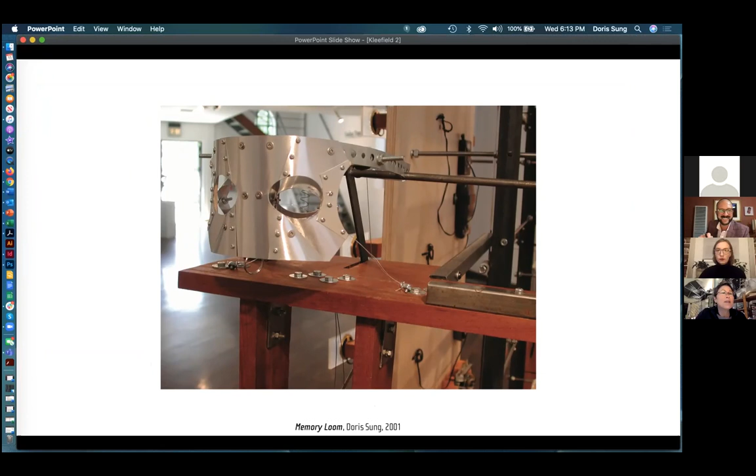Without going back through it—again, thinking about what I said about the artwork—this is a piece that I did. Can you see it? Let me try one more time. Tell me if I'm not progressing through it. Can you see, now it works? Okay, so this is artwork that I did in college. I'm not saying it's good at all, but I did it.

The biology I majored in college, I was very infatuated with—the connection with man, the artifact, the man-made versus the nature-made, and the extension and prosthetics of the human body. So the Rebecca Horn fingers, the sensation extended through the inanimate object. And then the question ultimately of why can't architecture be like that? Why can't architecture feel things, or why can't I feel things through the architecture, and it be dynamic just like my own body?

So even in graduate school, I actually built this—it was also a mechanical device that moved and responded to my face. Ultimately what I did is I designed a mask, not that it was for a death mask, but it was a lock system that made my face the key. I continued doing work like this for about 10 years, trying to figure out what that connection was to simulating the human body in many ways.

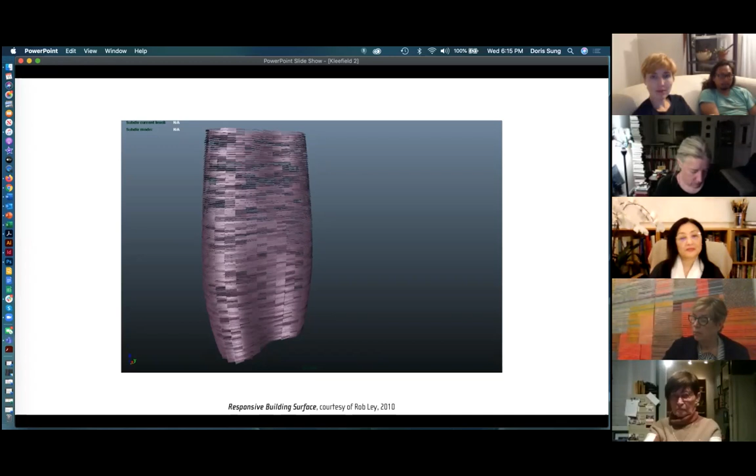And if the climate's going to change, architecture also has to change and respond accordingly. So then I started thinking about how architecture needs to be dynamic, and somehow it cannot be as stiff and static as it is now.

I started looking at different precedents and how smart they were, something like the igloo, which is brilliant. The shape of it allows the wind to go over it and pass, and structurally it's completely sound and spans a space inside. The blocks are filled with air, little tiny air bubbles, and insulate quite well.

And on the inside, when it's hot and you have the fire going, it melts the ice and freezes it up so it seals all the cracks. So it's actually surprisingly warm in the end, and a very renewable material.

It's the same thing you could see with yurts and the use of goat skins or felts from animal fur. The fact that it's mobile, it's lightweight, it's extremely insulating, it's waterproof, and it's also breathable.

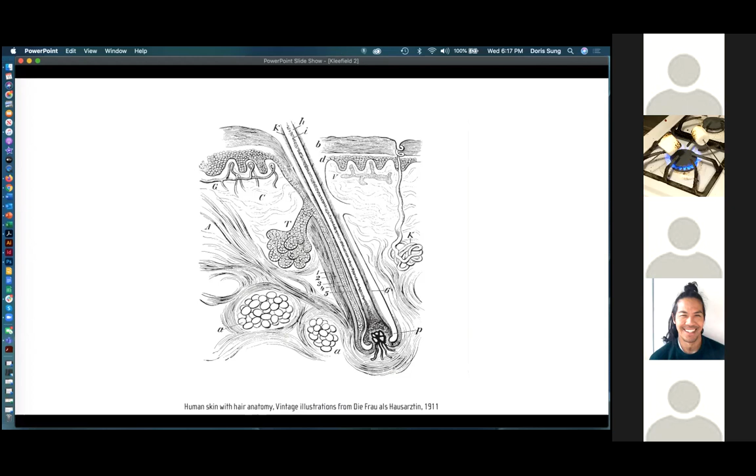So I also thought, why can't that skin, as an introduction, be like human skin? The human skin, keep in mind, is the largest organ on the body, and it's the first line of defense. It basically does so many things, like containing your body, waterproofing, controlling the heat by sweating, by having goosebumps when it's too cold.

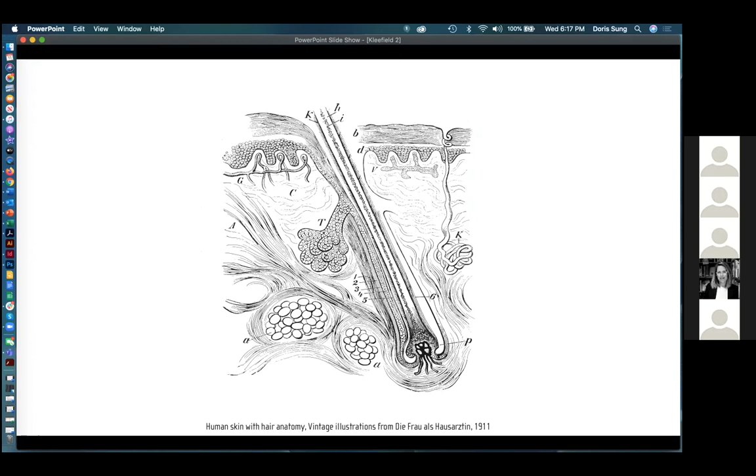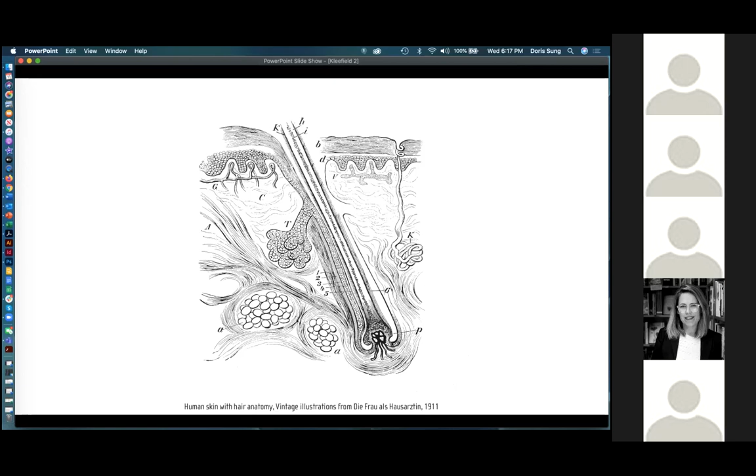All these different things so that the heart and the lungs don't have to overwork. And so the idea that I had is, why can't the building skin do this so that the heating, ventilating, and air conditioning system did not have to overwork?

It's just gadgets. So I started looking at smart materials, thinking that this would be a source for it, and basically found that in engineering terms, a smart material is something that responds to changing conditions in their surroundings, and they require no energy and no control.

So it's very, very different than, for example, a smartphone or other smart devices that are reliant on electricity, batteries, and computer systems or microchips.

So the smart material that I found and started using is a thermal bimetal. Basically, what happens is as the temperature goes up, it curls, you can see here. It's a lamination of two different alloys of metal together, and they have different coefficients of expansion. So as the temperature goes up, one side expands more than the other, and therefore the result is a curl.

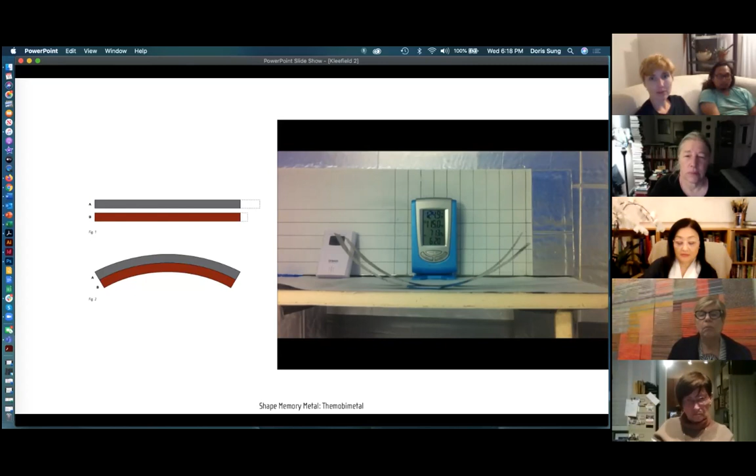I also combine these things with geometries. You can see here, this is an image from, I think, elementary schools in France from probably the 1920s that delineate the different geometries that we all know and recognize.

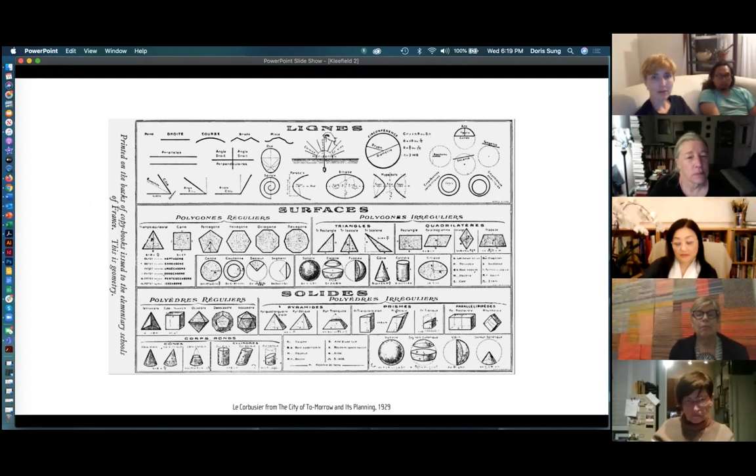And then nowadays, with the use of computation and things that are much more complex, we are able to look at geometries that are more surface-like, or actually what's called minimal surfaces. And you can see here, they become much more complex and therefore have a different kind of structural capability. They're also efficient with the use of materials by looking at some of these different curvilinear surfaces.

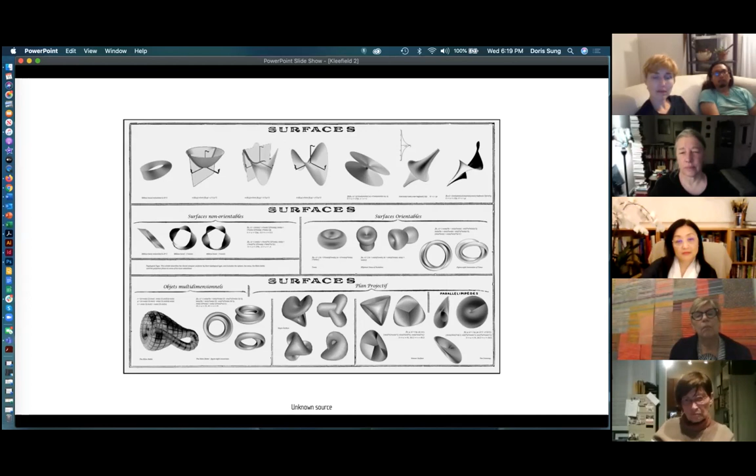So you'll see some of this also in the work that I do in both of these boards. And ultimately what I do is I try to look at these smart geometries, use them for smart applications, smart assemblies, and develop smart systems.

So I'm going to start showing some of these to you now. The four areas of current culture that I divide these into are social conscience, economy and efficiency, climate and engineering, and health and wellness. I do this not because they're actually very distinctly categorized into these areas. I just do this to highlight some of the things that are on my mind and concern nowadays.

So the first I'm going to talk about is social conscience.

This was an article that came out this summer in the New York Times—actually it wasn't a single article, it came out over 7 days, and it was all about women, women's issues, and biases. I thought they were quite good as articles, because even as an architect, it pointed out things that we as architects can do.

One example that seems obvious, and I'm sure everyone knows this: everywhere you go there's always a line outside the women's bathroom. You always wonder why aren't we putting more toilets or stalls in women's bathrooms than men's. A lot of this is dictated by code or by developers trying to minimize numbers to the minimum, so the code itself is biased towards men in that way.

So is the temperature in a building. Women are always colder in buildings than men, and so it's actually set at the temperature that's comfortable for men. There are several things that, when you really start to think about it, which I never thought of before, are something architects should address.

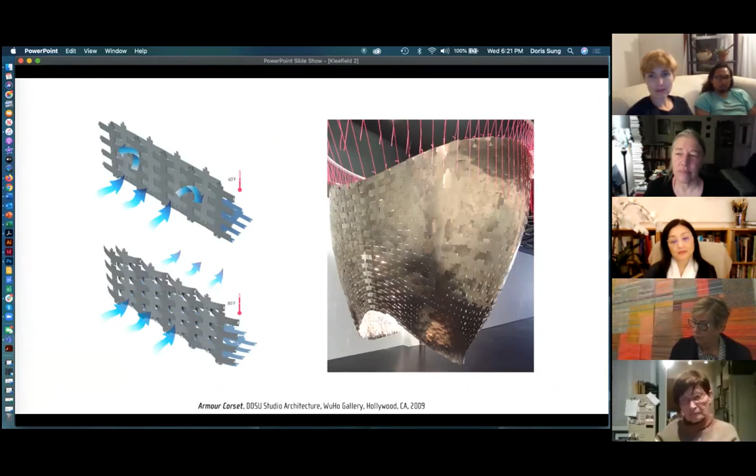Nor did I ever stop to think about how women should design, or if products designed by women should be any different. So when it came to building some of these things I do, I realized there's a certain amount of femininity to it, even though the materials may not be. In this project, I even chose a pink string and named it Armour Corset, just because it had this kind of reminiscent value to it.

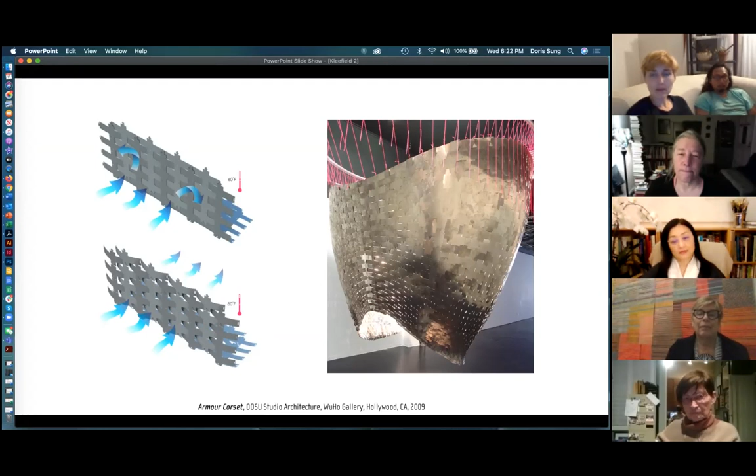So you can see in my own work that I start thinking about these names and trying to reflect on what those things are. Whether they are true or not is something that goes on in my mind.

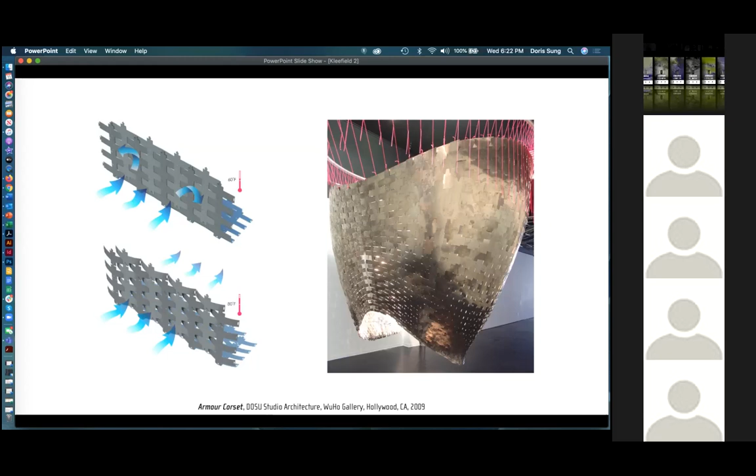This is the first project that I did out of thermal bimetal. You can see on the left, the idea is that it would be a ventilating surface. When it's cold, it'd be a very taut, flat surface, and when the temperature rose, the air would be able to pass through the surface.

It was also a very innovative time in 2009, because we used a very powerful computational software that basically parameterized each of the pieces so that each piece could have the same basic rules, but each piece is different than the next, so it can take a different form. We combined it with a slot-and-tab type of connection so we could remove all structure and make it a complete and continuous surface.

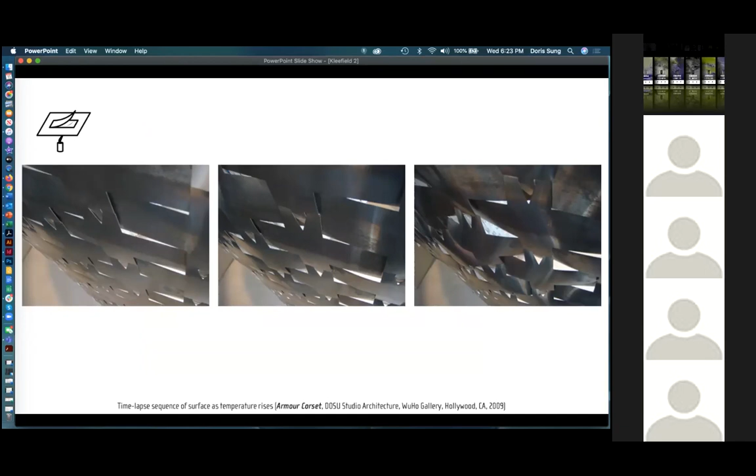So you can see here in a sequence from left to right, cold on the left and hot on the right, how the surface actually distorted to allow the air to go through. That was very exciting for us, because this material has never been used in a surface before. The only place you'd actually see this material is as a coil in a thermostat, in these little tiny strips as actuators.

So when I started looking at the material, I thought, why can't we use this as a surface? Because we need to use it as surface in architecture. What we call tessellation, the tiling of all these small pieces, is a necessity, because the material comes in narrow rolls—you can't just roll out a very big surface, nor can you get shapes out of it. So by making it into different tiles, we can get the shape.

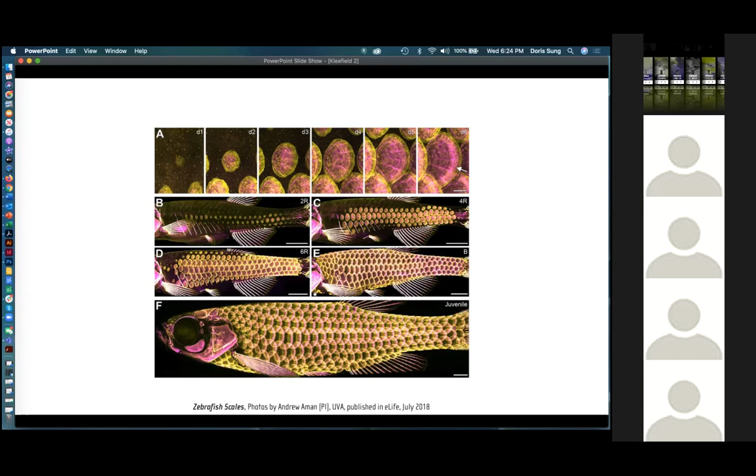You can see even here in this fish, the scales are also parameterized—they have the same properties in each scale, but depending on where that scale is on the fish, it differentiates in size and overall dimensions. There's a kind of gradual scaling, no pun intended, of these scales as they go from front to back. So these things also occur in the work that I do, this kind of scaling or tessellation.

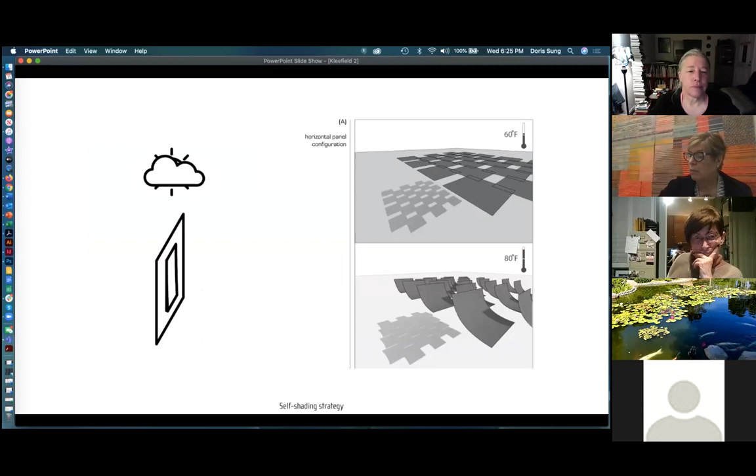As the sun was exposed, it would behave differently, and as it disappeared, it would close up. We connected it to various different computational software that allowed each of these pieces to be either longer or shorter, depending on where it was on the structure.

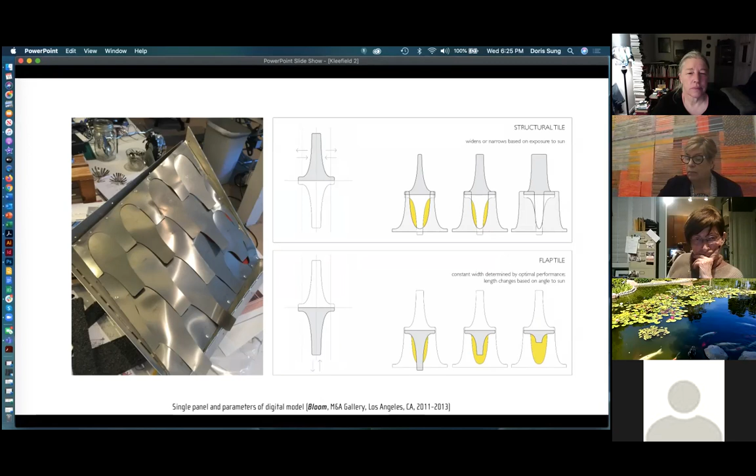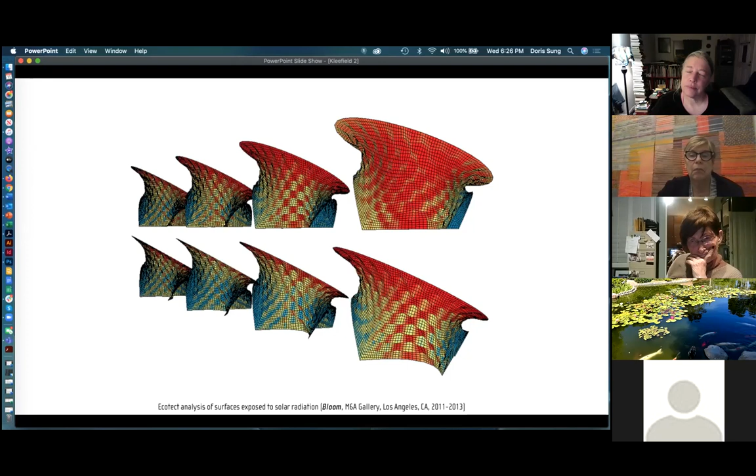So we were very encouraged to know that we can possibly work it on architecture and this material can react to the sun.

We also look at things of economy and efficiency in a different way too, right? Another book that influenced me quite a bit is Cradle to Cradle. This idea about circular economy and this responsibility that was much bigger than just recycling and saving energy.

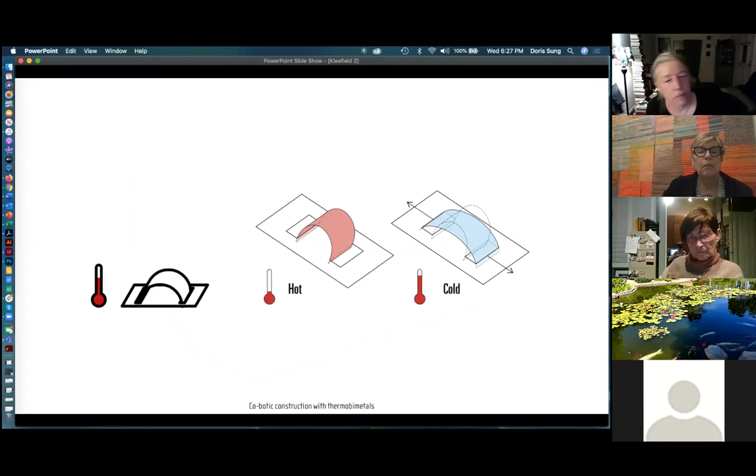We tried to look at how we can think about making things efficiently, using less skill, and in hard to reach places. So in this case, we use a much thicker thermal bimetal that reacts at a higher temperature. We heated it up to about 250 to 300 degrees.

If you do that, the material that is really hard to curl by hand when it's cold, because it's that thick, curls very nicely. You can slot it into something, and as it cools down, it constricts into shape, making what's called a pre-stressed surface. It's very lightweight and very strong.

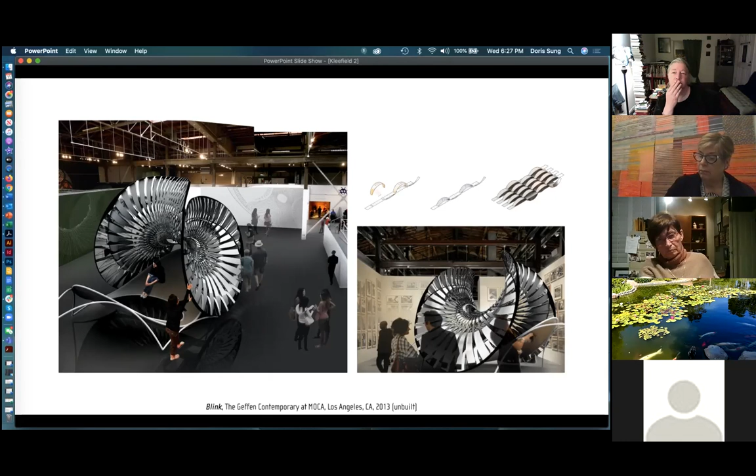And so the proposal that we made was for MoCA in 2013, and they commissioned us to do a pavilion for an exhibit there. But it turns out that was a really bad summer for MoCA. They almost closed down, almost went bankrupt. It was a very difficult time and the project was never built.

But the good thing is it was picked up by the Museum of Contemporary Art in Santa Barbara. We decided not to build the same thing, because to me, each installation is another opportunity to try something new. So I use it as a time that, in my mind, we could do more research. In their mind, it's just a more personalized installation.

So we took the basic same idea, and you can see here, it's a one hand, one person installation. As it's hot and wearing the glove, it's very curled. And if you put it into position and hold it there, it'll actually then start to flatten and constrict into its final position.

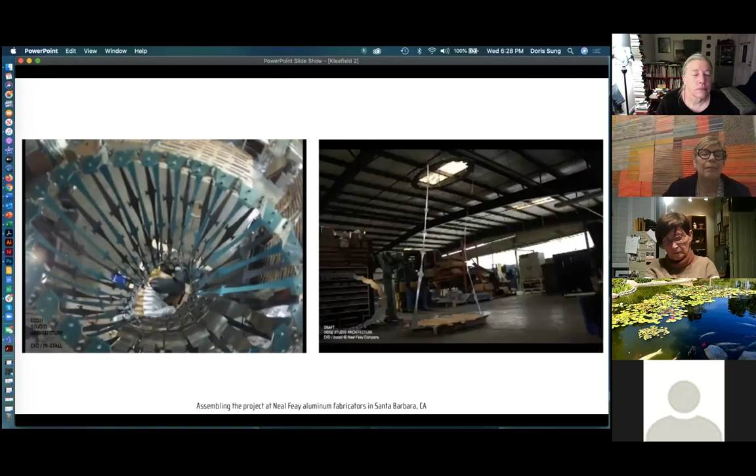You can see in the video on the left, we had one person on the inside, another person on the outside walking back and forth from the oven, passing the pieces, and you can see it go together. The silver parts are the thermal bimetal, the colored pieces are aluminum and are held taut. You can see in the right video.

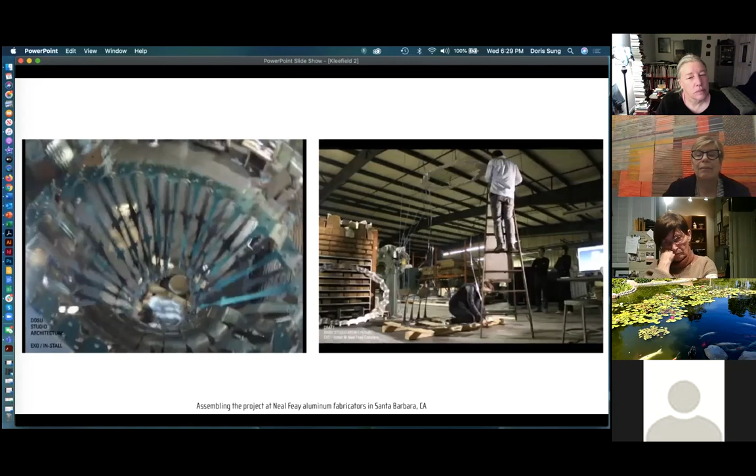The slack on the aluminum pieces that are first put in. And as all the thermal bimetal pieces start going in, it becomes very taut and very stiff.

We work with engineers on figuring out the structural capability of the piece, and it was actually surprisingly complex, so complex that it crashed their program. So the only way that we would know how much load this could do is by testing it the old-fashioned way, putting sandbags on it.

But unfortunately, the owners of the tower don't want to do that. So we don't know to this day, but we are estimating it to be about 2 tons that it can hold. So it's pretty good. You can see it was the bottom tier of a 5-tier tower that we ended up building.

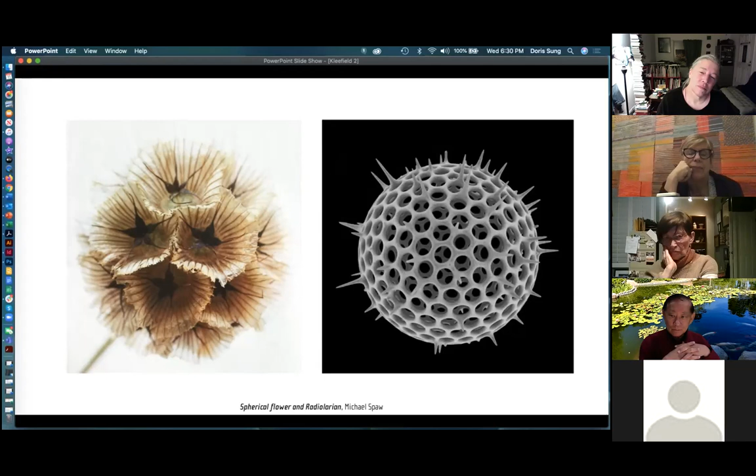Another project, again, going back to these geometries in biology - here on the right there's this radiolarian, on the left there's this kind of spherical flower. They're part of the inspiration of how I think about things and put things together. In this case, it was very connected to Buckminster Fuller's dome, which is also about that geometry and influenced his work.

But very directly, it was a way that I could use that same type of system from the previous project, but in a continuous surface. And it's continuous because in a sphere, basically there's no edges to it. So it just goes around and around forever, and therefore I didn't have to worry about what's going to happen at the edge.

It would just be all surface. So in this idea, the blue conditions represent a cold material - that's where the thermal bimetal is. When we heat it up into the red configuration, it gets really tight and small. We place it into that pentagon position, it cools down and expands into position, and therefore pushes all the pieces together and starts to allow us a way to assemble a sphere.

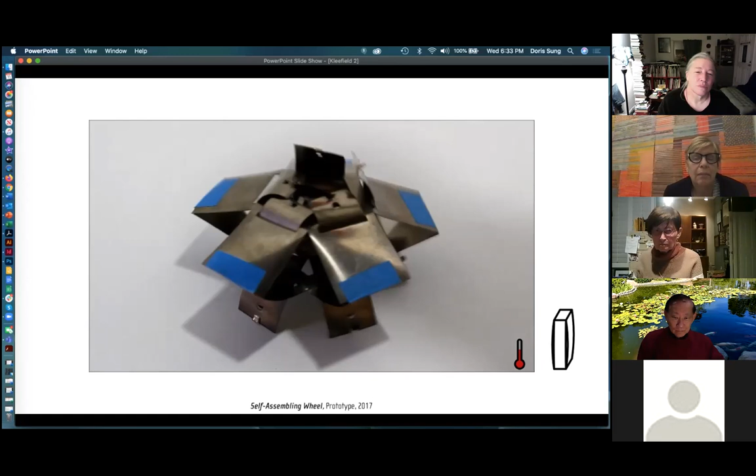And since then we built other kinds of things. This is actually a wheel that we put together, and the idea was that it was a wheel to a flat pack vehicle, so that virtually we could make a whole vehicle and energize it just by opening a package and putting it in the sun.

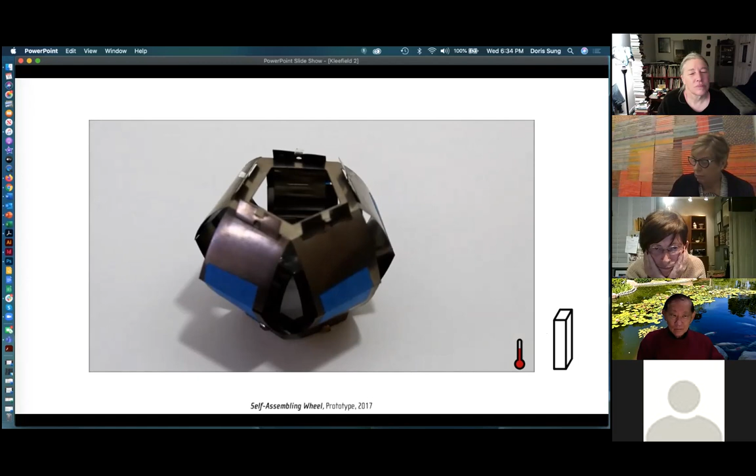Climate and energy, and this is where our project for Cal State Long Beach actually exists, I think in my lecture at least, but not just in the climate and energy area, but this was a part of what was very important to us.

And so my attitude was, concerned about all this climate stuff, if we could just take that down by some percentage, we've made a very big deal because of the percentage of all energy use that's dependent on it for buildings. So this became a very big target for me.

In addition, we have the heat island effect in cities that many of you have heard about. The hard surfaces in cities are not allowing cities to cool down overnight the way they should, the way it is in rural areas. So since it's not cooling down at night, it gets hotter and hotter every day.

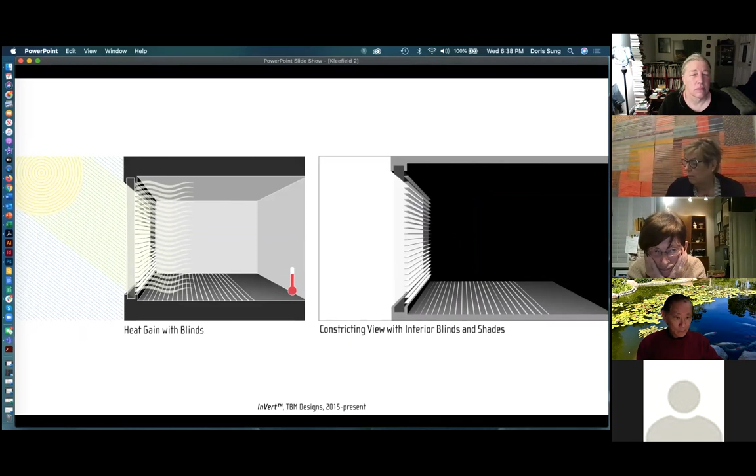We have blinds too, and everyone thinks using blinds is a cheap way to do it, but the heat has already gotten into the building by then, and you still have to use air conditioning. In addition, when you finally close those blinds, they cut out a huge amount of the view.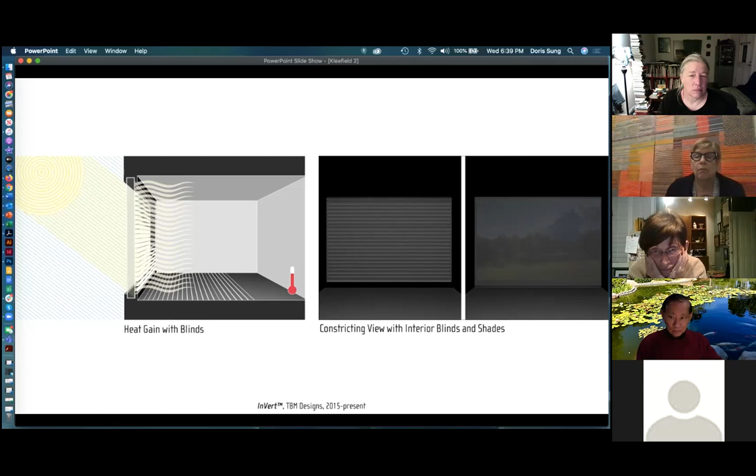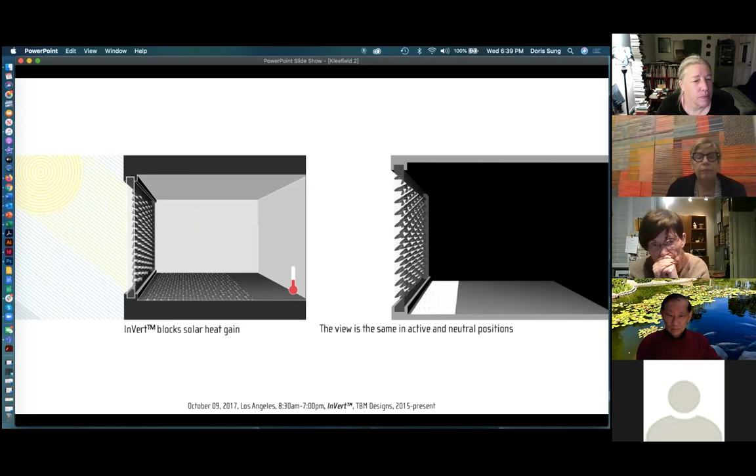So InVert self-shading windows is the product we're using on this project. It blocks the sun by using very small pieces inside the cavity of a standard IGU or double glazed system. They flip over, and as you saw on the right, they do not constrict the view when they're opened or closed, when they're neutral or active.

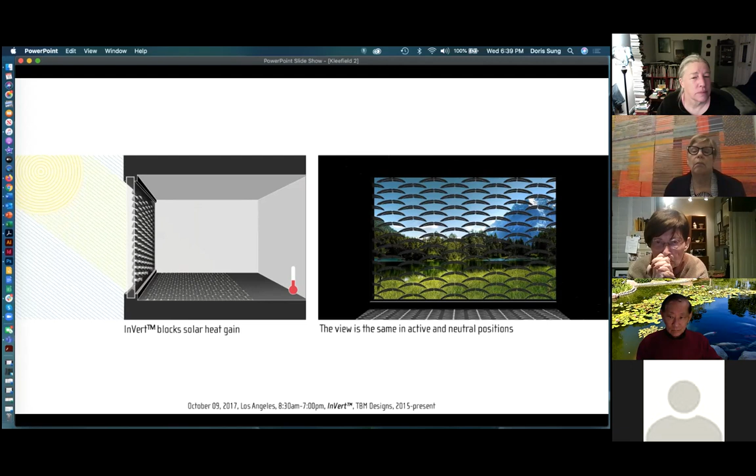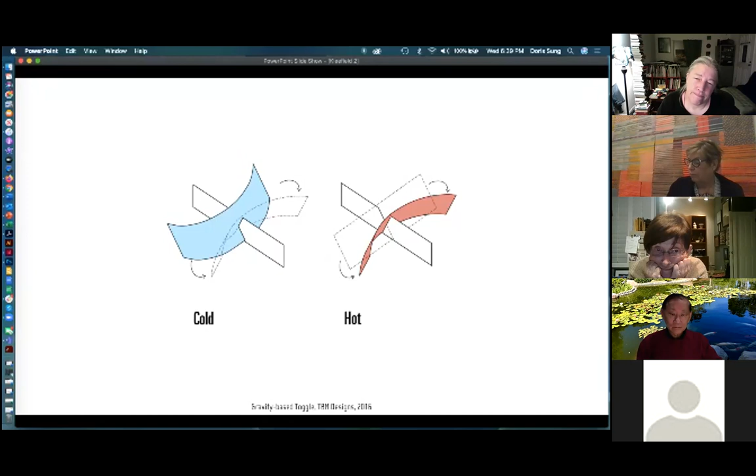What it does is use this flipping geometry, where you can see when it's cold it's in one direction, and when it heats up it flips over into the other direction. By flipping into that hot direction, it blocks the sun from coming into the building.

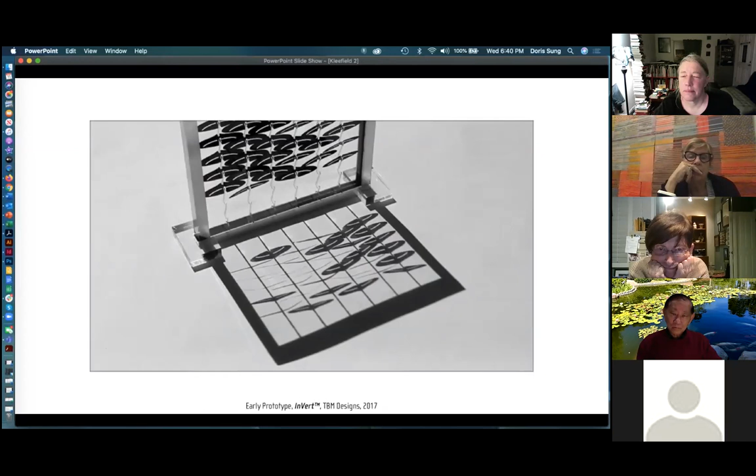We changed a lot of the networking. You can see it moves to a metal type of networking, a slightly different shape to the pieces. We went through so many different iterations of what those piece shapes could be, what would work for both flipping and for shading. We finally came to near the shape we have now, because we were able to get a large amount of shading coverage from a very small piece, as you can see here.

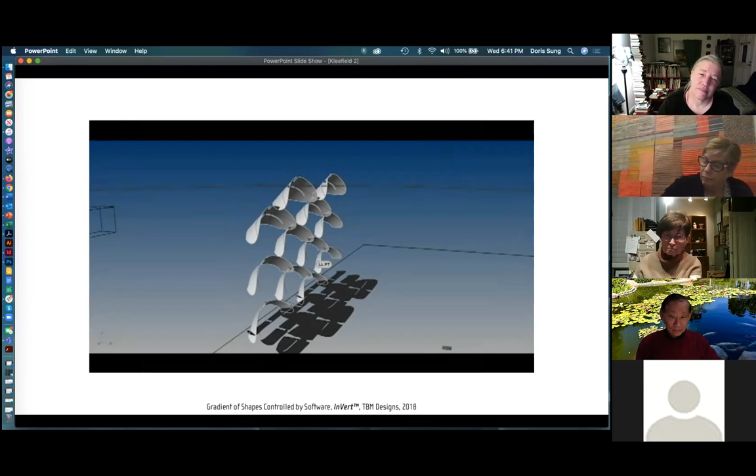So we have the ability to make a gradient out of the system. You can see the pieces at the top are bigger and the pieces at the bottom are smaller, so we can control visibility through the system.

So variations - it's kind of nice, if you think about that video I had earlier of the building changing throughout the day and depending on whether clouds are on it or not, the building itself can potentially change and not look the same at any time of day.

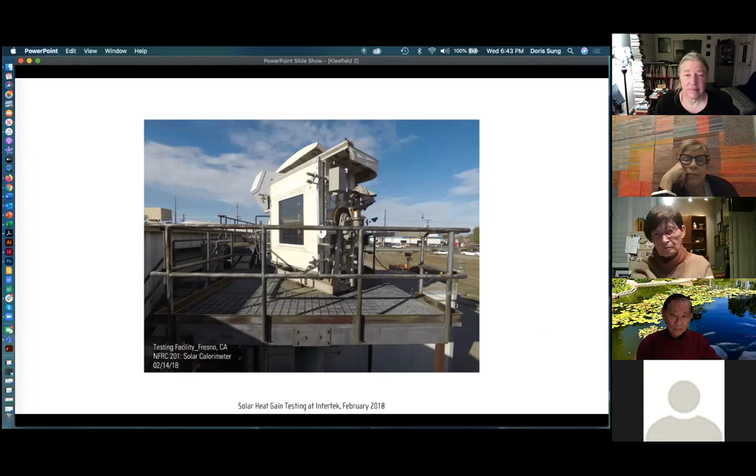We started putting colors on it, and that's what we're going to do for the project - I'll show that in a few seconds. We've gone through a lot of extensive testing for it. You can see here the testing site in Fresno, throughout the course of the day, how they do the testing and control it to always face the sun in the worst case scenario.

And we've gotten several awards this past year as a product, and a lot of support, which we're very excited about.

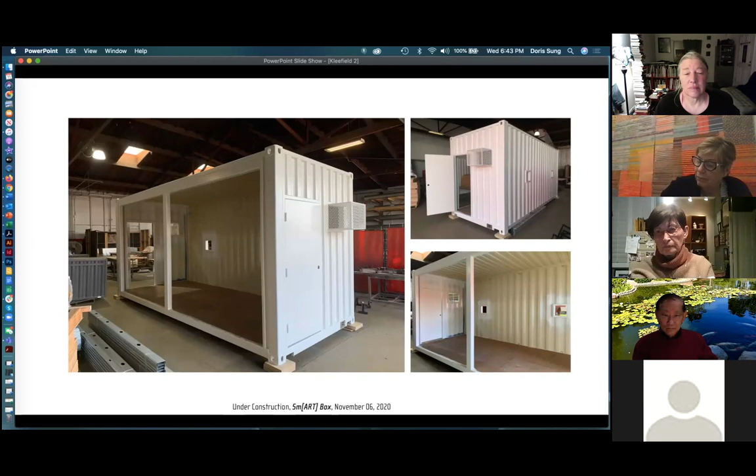Knowing that the shipping container has a long history through the port, and that it's a recycled, reused container, even though it looks pretty good here, nicely painted, we are partnering with one of my friends who goes by the name Yalu. She's an amazing artist, a video artist, and has allowed us to use some of her graphics on that container. You can see in the rendering how we're going to try to use that graphic around it and actually use the colors through the windows. You see 4 windows on the front to extend that graphic in a pixelated way.

Here's a closer up with it. Again, these are just renderings. We're in the middle of finishing up the windows right now. Here you can see the pixelation, the color pattern that we're planning to put on the windows themselves.

Then the idea is on the back of the container, we put these 2 little portholes that you can go up and peek through, and you'll be able to see through the inside of these windows without entering the entire container.

So just to give you a sense of it, we're in the process of manufacturing it here. You can see we're 3D printing some of the clips that you see on the left that go and hold the thing together.

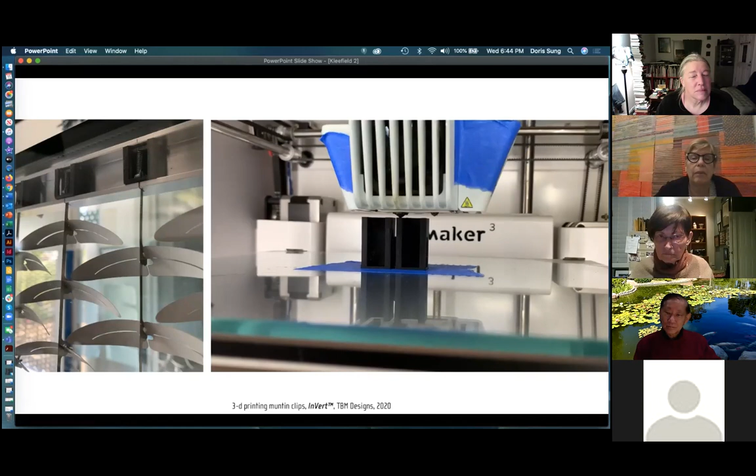Esther here is putting those clips together. We're painting the pieces as they are being prepared to go into the window system, sanding down what we call the muntin that holds all the pieces together. Testing them, we just have frames that we test them on to make sure that they're working for quality control.

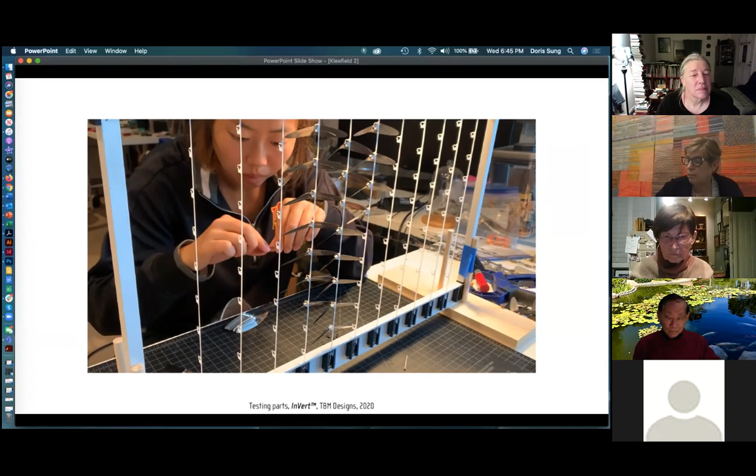We also test them outside to see how they behave with the sun, and continue working on it. So hopefully we'll get it in before Thanksgiving, and I'll be able to see it at that time.

The last project I'm going to share is something I'm working on, because a lot of people always ask me, well, what are you working on now? Something that I'm also excited about. Again, it overlaps with many of the things that I've done thus far. There's an equation of architecture with our food culture too, historically, on a very simple level.

In the olden days, food was for fuel, if you think of it that way. Then as culture developed, there's a whole period of food for gluttony. Some of that probably still happens now. But more currently, the attitude to food is that it's for nutrition, right? And that healthfulness is the idea of food and how we should be eating.

Architecture is very similar, right? Way back then, architecture was just simple shelter. Then there was a period of architecture for luxury, this really flamboyant period of architecture that again lingers today. But more recently, this attitude of architecture for wellness, of how we're looking to architecture to be part of that entire system.

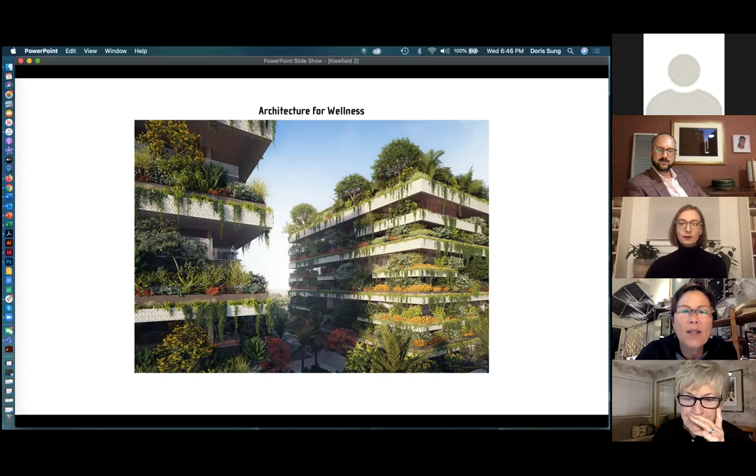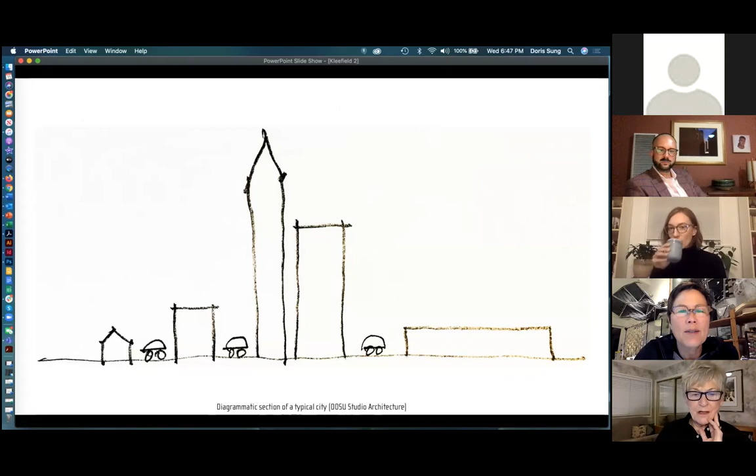So the project that I'm working on is basically trying to look at how we can deal with some of these real big problems of a city through architecture, in this case, making smog eating panels. Here's the typical city, a very simplistic diagram. All these surfaces that you see in pink can be used and should be used for the city and not just for the interior occupants or for that building's owner. Instead of being a way that filters light and brings in views as well as branding for a building, why can't these surfaces be used for the city?

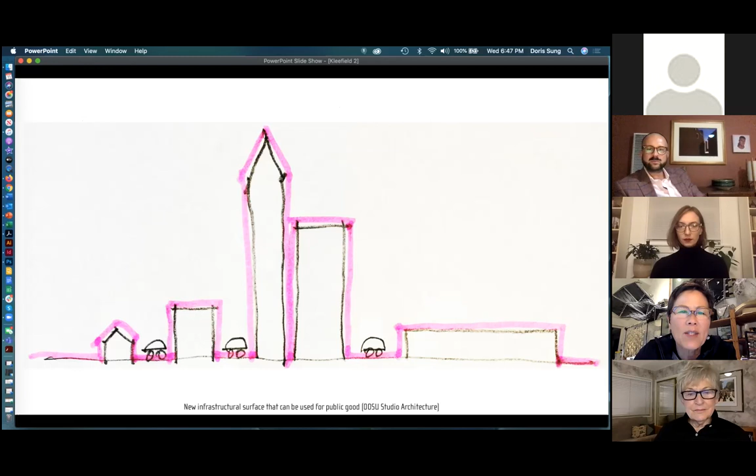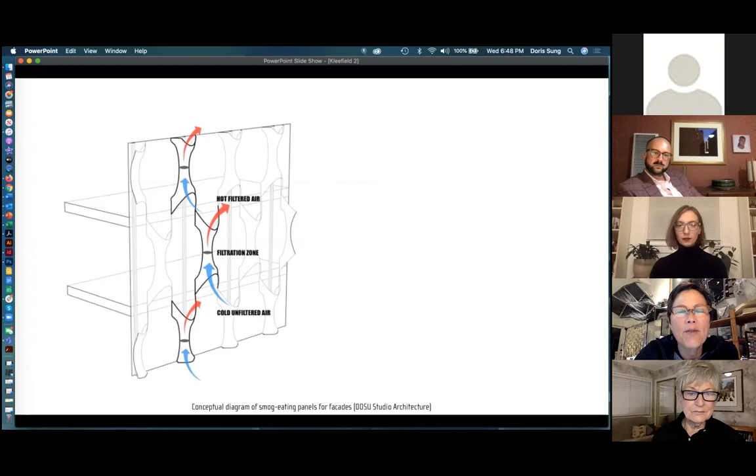So that's what I propose, how to make these panels basically filter smog and contribute to public health of the city. The smog sits at the very bottom of what's called urban canyons, right? They drop as particulate matter, and unfortunately, that's where all the pedestrians are. So the simple idea is trying to make this porous system of panels so that the air can actually pass through and filter, therefore filtering the air at the very lower areas of the urban canyons.

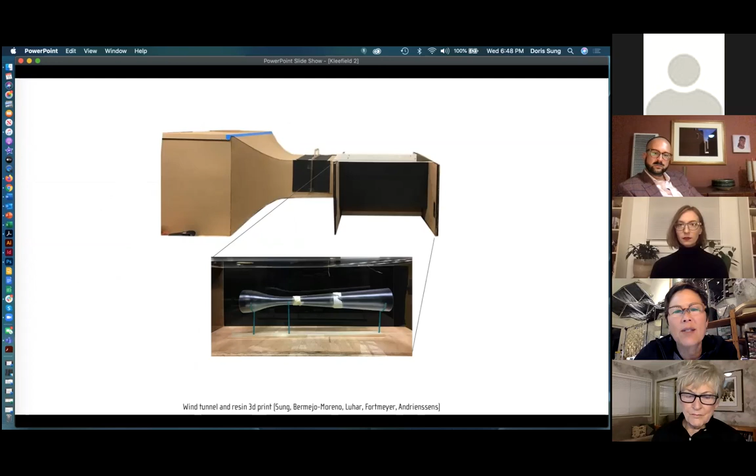So just very quickly, we're building wind tunnels. We're working with aerospace engineers on this. You can see one of our early prototypes of the type of tube that's going to ventilate and filter. It's inside a wind tunnel, and you can see our simulation modeling below.

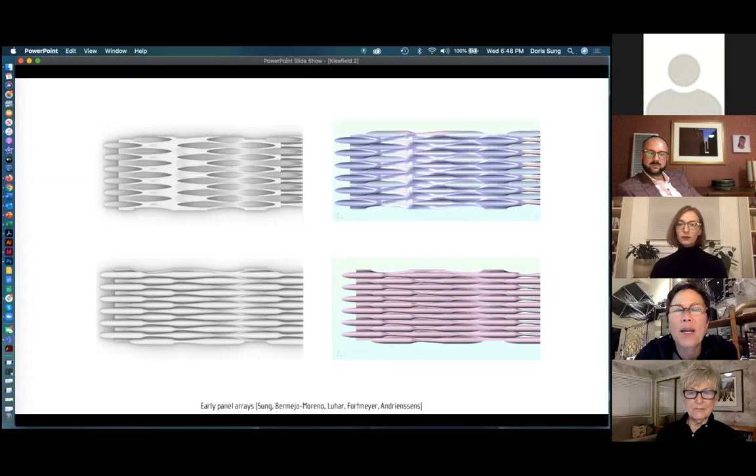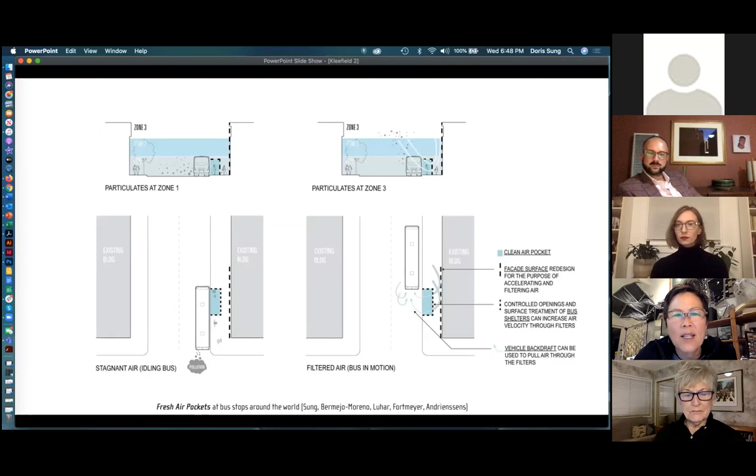Early developments, early speculations of what panels might be and might work like, and how they go inside and outside these tubes. The whole idea eventually is to build these little fresh air pockets that are bus shelters in cities around the world, where people sit and wait for long hours and get some of the worst quality of air. So as a reversal, we're trying to make these bus shelters the freshest places to sit and the cleanest air in the city by proposing these surfaces.